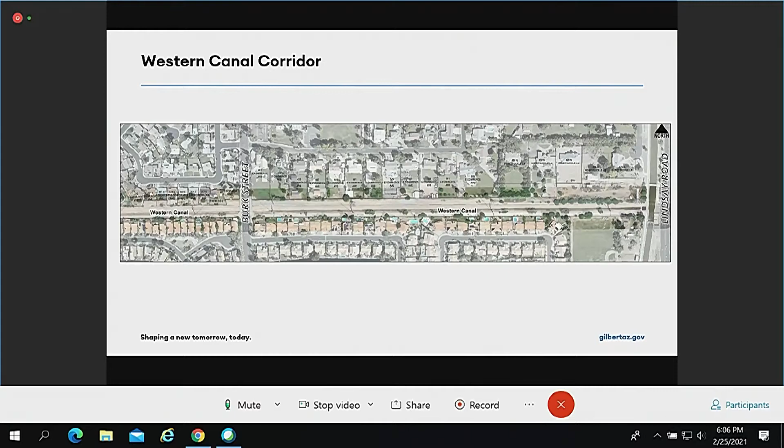Touching first on the town utilities through this corridor, we have three critical pieces of infrastructure. First, shown by the green line, is our 36-inch sewer. This was installed in 1986 within a 25-foot public utility easement. It's made of reinforced concrete pipe with an HDPE liner, and this pipe collects 3 million gallons a day of wastewater from approximately 15,000 households in the north part of Gilbert.

Adjacent to that 36-inch sewer is an 18-inch reclaimed water line installed under the same project in 1986. Once that wastewater is treated at our Neely Water Reclamation Facility, this pipeline takes that treated effluent and sends it to the reclaimed customers in the north part of town. This pipe is composed of asbestos cement, and the town is actively looking to get rid of this pipe material in its system based on leak history and failures we've experienced over time.

So based on the age, being 35 years old, and the material that this pipe is made of, we know we're going to have to complete replacement of this line in the near future.

South of these two pipelines, within a town-owned Gilbert parcel in the Western Canal, is a 24-inch potable water line. This was installed in 1991 and made up of a concrete cylinder pipe. In 2018, we experienced a failure on this line within Freestone Park, which raised our awareness and concern over the integrity of this pipeline.

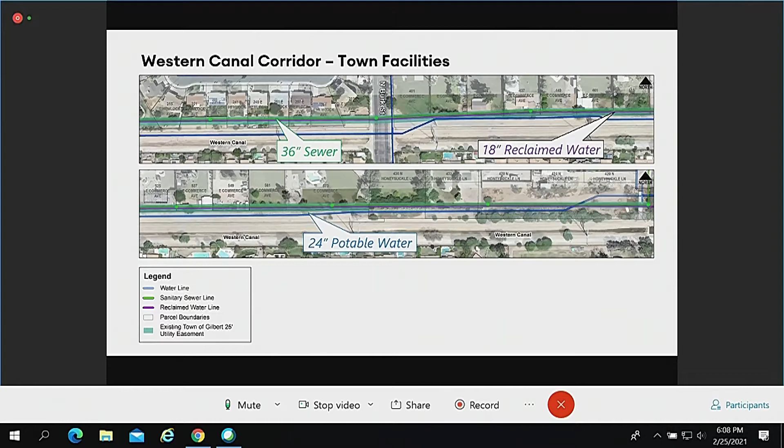Now to touch on some of SRP's facilities that exist within this section. SRP has the Western Canal, which is lateral 9.5. They also have a secondary delivery canal north of that, which is lateral 9.4. There's 2 sets of electrical transmission towers with both single poles and lattice towers - a 500 kV on the south side of the Western Canal and a 230 kV on the north side. So this is a very critical corridor for both town and SRP, and very congested. You can see highlighted in the orange hatched area, that is SRP's existing easements for their overhead electrical.

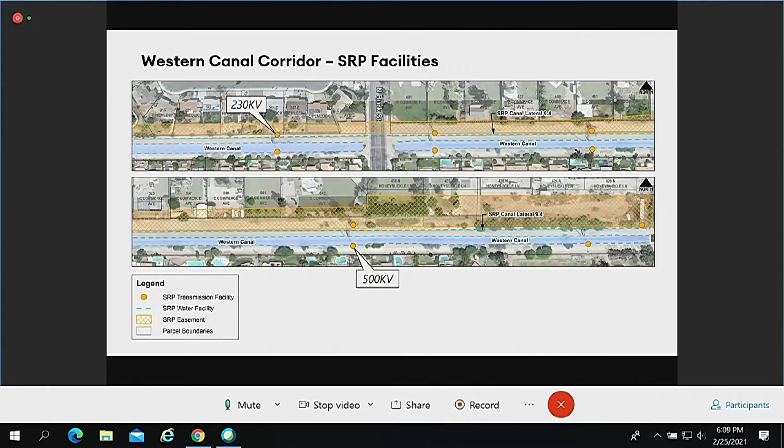So focusing in on the section west of Burk, you see the town facilities here. That green line is the 36-inch sewer. The purple line is the 18-inch reclaimed water. The blue line just north of the Western Canal is the 24-inch potable water. The green shaded area is the town of Gilbert public utility easement.

And then the orange hatched area is SRP's easement. And you can see that west of Burk, the town's easement and the SRP easement share the same common line on the north edge. They're 36.5 feet from the southern property line of these parcels, extending the same distance north.

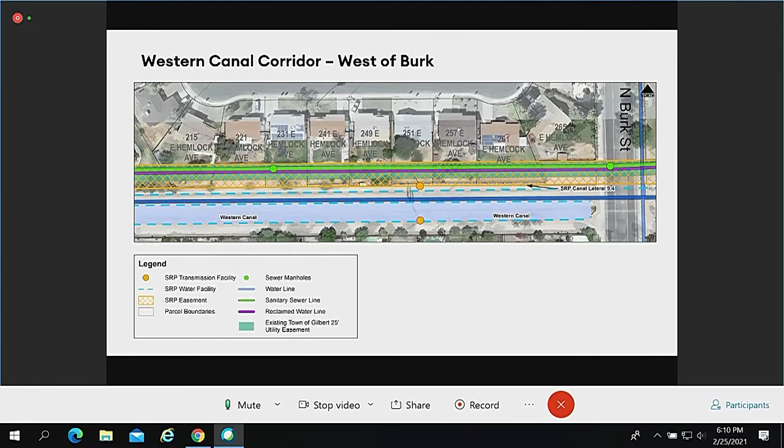Zooming in a little closer here just to give a feel for what the town utilities are and where they are relative in that parcel. You can see that green line, which is the sewer, the purple, which is the reclaimed water line, exists within that 25-foot easement, with the SRP easement overlapping that. Our easement was offset from the southern property line 11.5 feet because of the existing transmission tower that exists along that southern property line. So SRP required us to shift our easement north to provide adequate separation from their facility.

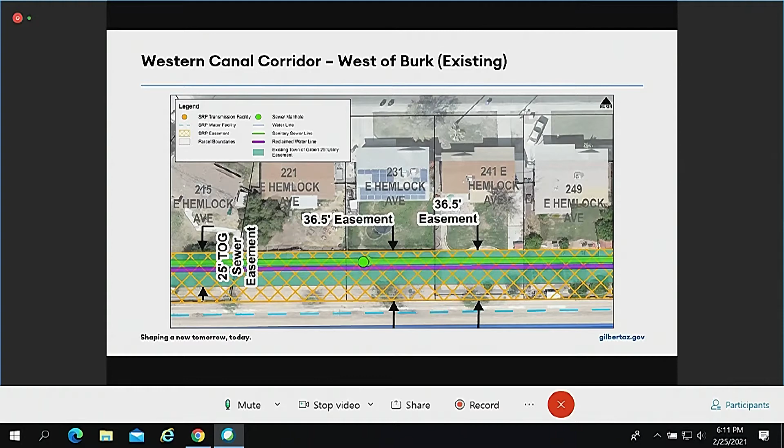So this is a cross-section of that same location, just to try to show a visual of the height and depth of the existing facilities. Starting from the left side, you can see that 500 kV tower there. Then you have the Western Canal. And between the Western Canal and that secondary delivery lateral is our 24-inch water. It straddles both of those canals. It's approximately 5.5 feet deep in this area.

After you go right or north from that, you see that second SRP tower, which is the double circuit 230 kV tower. And then just north of that is the existing masonry wall on many of these parcels. To the right of that, 11.5 feet, you see the town of Gilbert public utility easement, which is 25 foot wide, which encompasses our 18-inch reclaimed water line with approximately 6 feet of cover, and the 36-inch sewer, which is approximately 15.5 feet of cover, 19 foot to the bottom of that pipe.

This red dashed line here is the property line for these parcels. You can see that tower is just off the property line for these parcels. The green shaded area is the town of Gilbert public utility easement, where we had to shift that easement to the north back in 1986 when it was acquired by the town to provide that separation from that SRP tower.

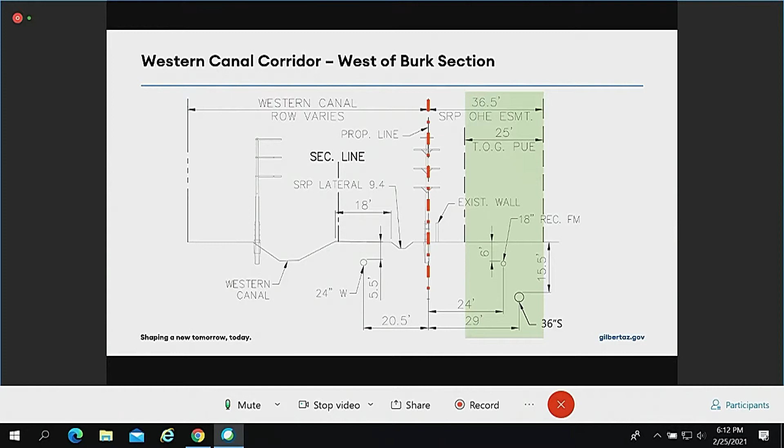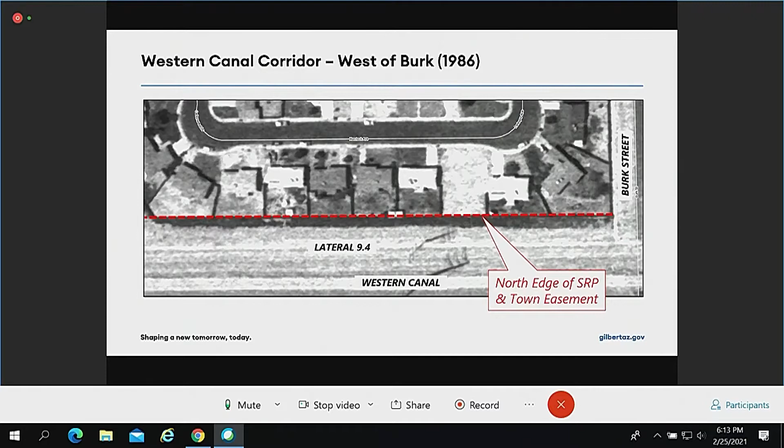There was no obstructions within the SRP or town easement at that time. As we progress 30 years later, 2016, we see that many of the parcels have extended their wall to the south, likely with approval by SRP and the town at that point. But you can see that 6 of these 9 parcels have now built their masonry walls within the existing easement area, creating obstructions to access those 2 utilities.

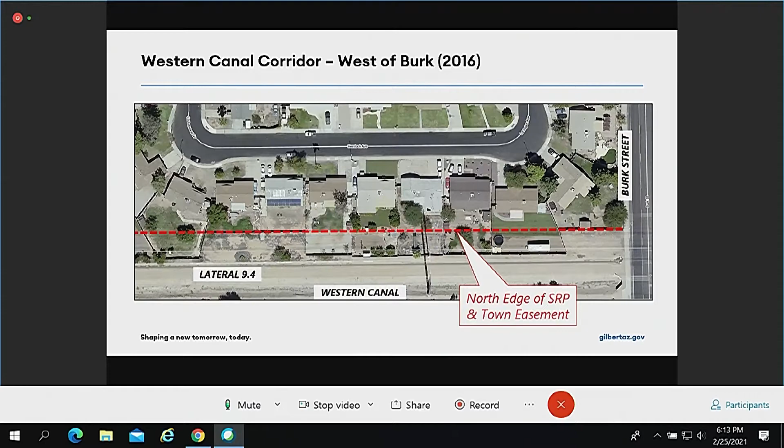Now we'll focus on the section from Burk to Lindsay. As I described in the other slide, the SRP and the town easements overlap each other. We have those 3 critical pieces of infrastructure through this segment.

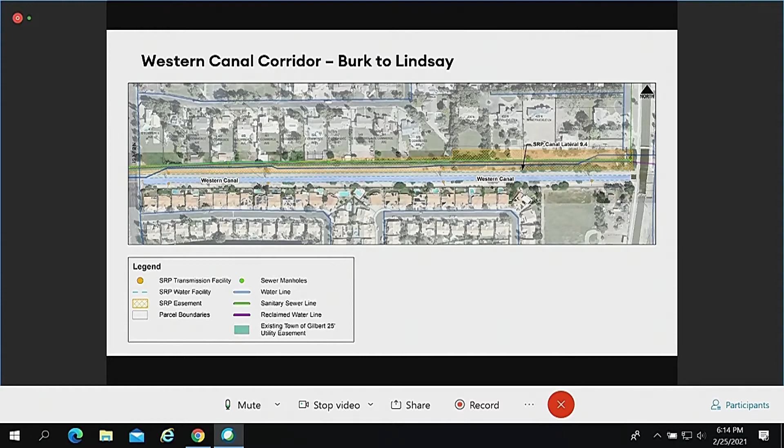Zooming in further to show some detail of how they exist currently, we have our town easement in the green shaded area. The green line is the 36-inch sewer, the purple line is the reclaimed water line, and the blue line is our 24-inch potable water line. You can see the SRP easement is a little south of our easement here, but still overlaps.

You can see that 24-inch potable water line had to angle just after that SRP pole, to provide clearance to the SRP pole, and then jog to the south to where it straddles the canals going west.

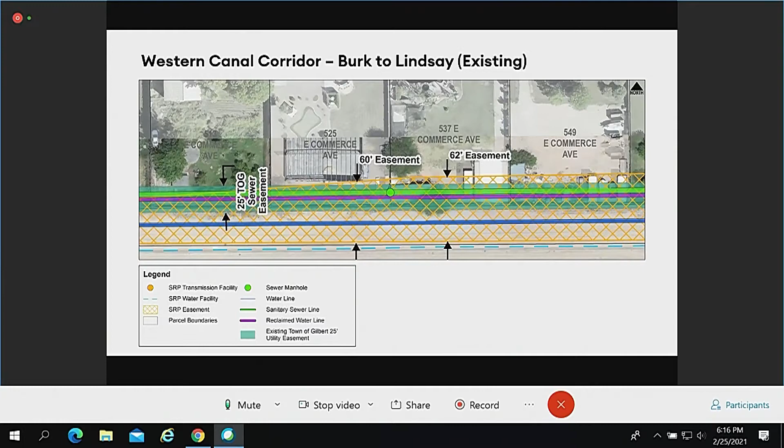So 9.5 feet north of that tower footing is our 24-inch water. We know that's probably as close as SRP is going to let us get to that tower, based on concerns over the structural integrity of the tower and having an active pressurized water line that close. There are significant concerns.

7.5 feet north of that, you have the property line for these parcels between Burk and Lindsay. The Town of Gilbert easement exists roughly 21 feet north of that property line and 4 feet south of it. So where that existing masonry wall is constructed on the south of these parcels, that is within the Town of Gilbert public utility easement. There we have our 18-inch reclaimed at 7 feet of cover and our 36-inch sewer with approximately 20 feet to the bottom of the pipe.

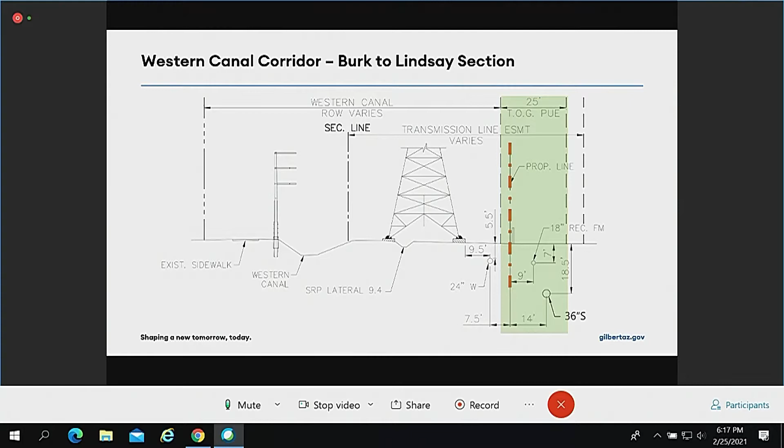To provide some background on the easements through this subdivision, this is the Gluchessi Ranch Phase 2 subdivision. The town easement was dedicated on the subdivision plat. SRP's easement existed prior to, but is reflected on the plat as well. The easement language from that plat reads: construction within easements, except by public agencies and utility companies, shall be limited to utilities and wood, wire, or removable section fencing.

The parcels east of Gluchessi Ranch are within the Rio Caballo subdivision. That was developed prior to the reclaimed water and sewer going in, so the easement was acquired by the town in 1985 via a separate document, which reads similar to the Village 2 subdivision, granting the town the right to install, repair, maintain, alter, and operate that sanitary sewer and effluent water lines.

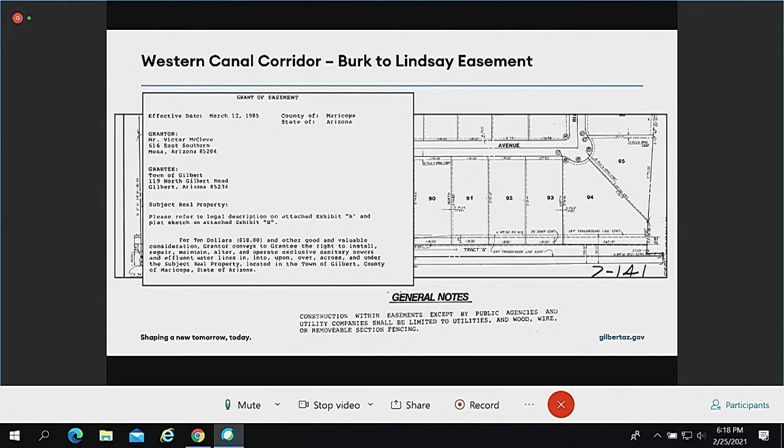Now I want to go over a little of the timeline of this project. Between 2015 and 2017, the town experienced some pretty significant failures on their wastewater system: the Layton Lakes Force Main, Crossroads Force Main, and a second Crossroads Force Main failure, which heightened the awareness of staff to complete an active inspection process for all of their wastewater infrastructure.

Following these failures, WW1060 was initiated with a first phase to repair an immediate need on Ocotillo, but also with an effort to complete a video assessment of this pipeline along the Western Canal. That assessment was completed on this 36-inch sewer from Lindsay all the way to Neely in 2017.

Following that assessment, we saw a significant degradation of that pipeline, and we knew there was a need to bring on a design engineer to immediately begin design of this project. Our design engineer, Entellus, was hired in March 2018.

Between mid-2018 and mid-2019, Entellus worked up 30% design plans. The scope of those plans had the intent to relocate this 36-inch sewer outside of these 24 parcels. We had full intent to place that 36-inch sewer within SRP property, the town parcel, and outside of the residential parcels. Based on initial collaboration meetings and working through those plans with SRP, it was deemed a non-starter with zero chance of relocating this sewer within the Western Canal, based on this being USA fee land by the Bureau of Reclamation, with zero potential to relocate outside of the easement into the Western Canal.

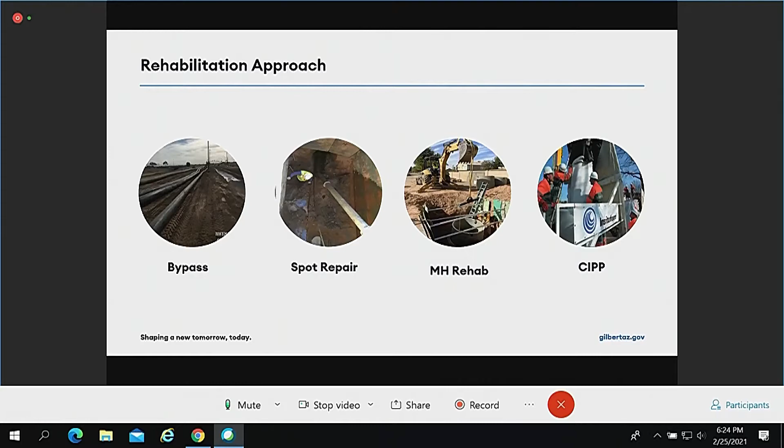So just to dive a little deeper into those 4 areas of work, this is what a typical bypass setup looks like. This was down on Ocotillo when the first phase of this project was under construction, with similar flows. You can see numerous plastic pipes laid out here on the surface. To bypass that 3 million gallons, it's likely we will have numerous pipes on the surface. We're not sure whether those would go north of the existing sewer or south within the town-owned parcel, or potentially the Western Canal. That bypass plan will be worked out with our contractor down the road, but we just want to convey what that visual will look like.

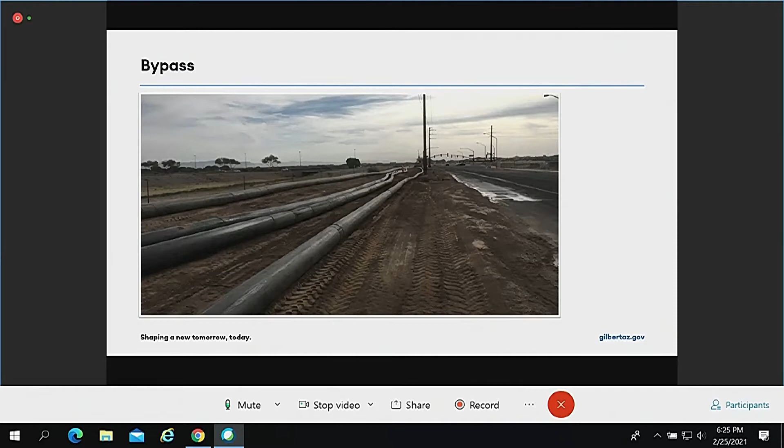And this isn't just a single pipe. There's likely triple containment because of the environmental concerns of a sanitary sewer overflow adjacent to these waterways. What that means is you have a pipe within a pipe within a pipe, so you have that triple protection to prevent spills within waterways. Another picture here just to show some scale of what that looks like. This is a significant effort to bypass those flows to complete the rehab option.

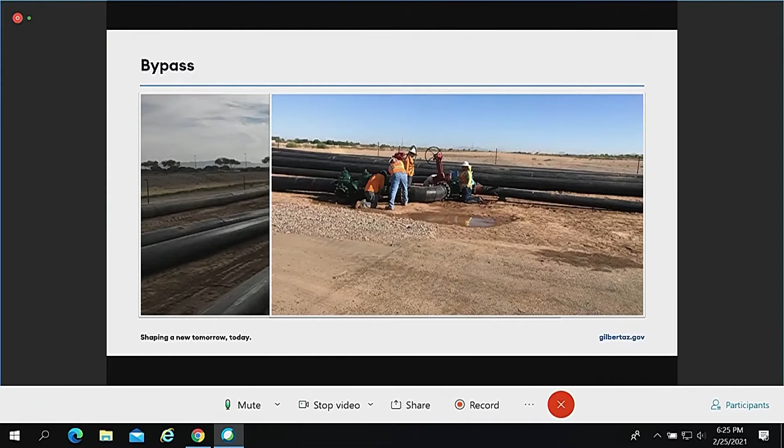So that spot repair - if we find areas in the pipe that require us to go in and replace that pipe prior to lining it, it may look something like this. We don't know of any at this point until we do a better assessment. The last assessment was 3 years ago. We'll go in, do an assessment prior to lining it, and identify these spot repair areas prior to starting construction. But this is just a general feel for what that may look like.

So the excavation area, if you can see that, would be approximately 10 foot by 40 foot, maybe 20 foot deep in some areas. It's going to require significant shoring to provide safety for the laborers as they're doing the work down in the trench. There also needs to be a significant work area to stockpile soil, bring in materials, and have work area for the contractor.

For this spot repair scenario, we'd be looking at approximately a 40-foot by 70-foot envelope. That would require removal of obstructions. We would have to remove the masonry walls that exist on these parcels, move structures out of the way, and we would be actively excavating in some of these parcels that need spot repairs.

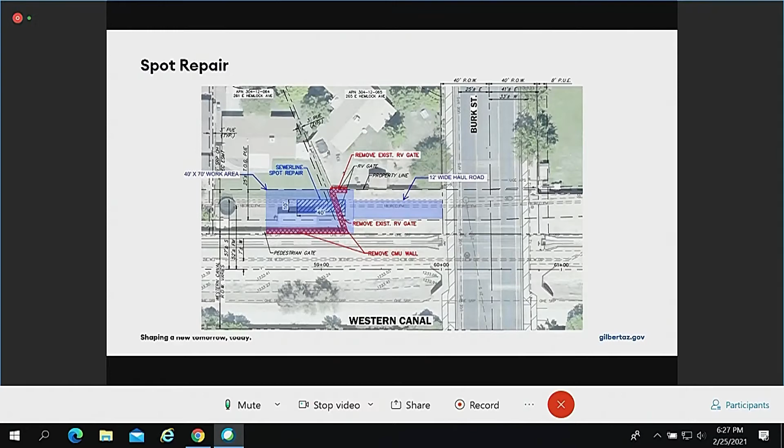Here's a good visual of a similar situation to what we have. This is a 36-inch reinforced concrete pipe where the entire top of the pipe has failed. You can see all that's left is the bottom half of that pipe. This may be the case in some areas along this alignment.

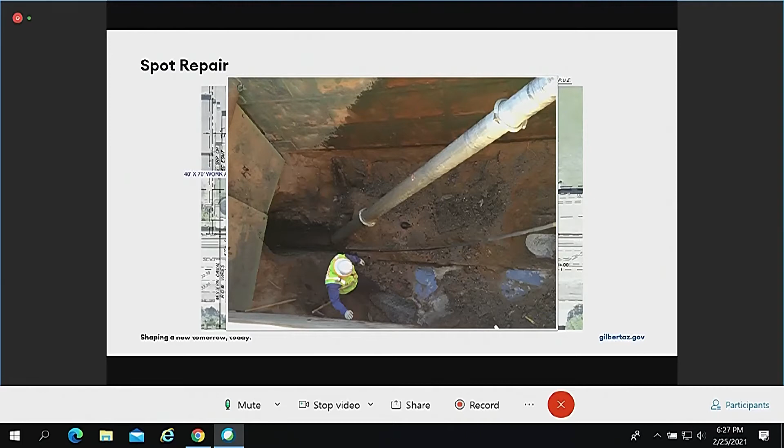Secondly, we'll have to do manhole rehabilitation. There's 6 manholes between these 24 parcels that we will have to go into and rehab due to significant corrosion. What that manhole rehabilitation effort looks like is inserting an inert material into the existing manhole.

So we will have to excavate around that manhole approximately 10 foot by 10 foot to remove the cone of the manhole to allow space to insert that liner within the existing manhole. To provide space for the contractor to work, it would likely be a 20 foot by approximately 50 foot area for staging of materials, soil, and equipment to get in there and do that work.

Once again, requiring removal of the walls and obstructions within that area. You can see on the right there an activity very similar to what we would be proposing for these rehabs.

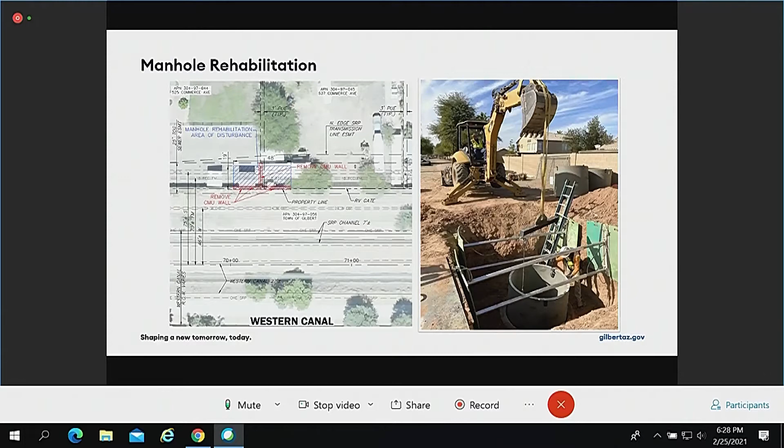After those rehabilitation efforts are completed, at that point we would be looking to install that cured-in-place pipe. We're trying to utilize that technology because it's the least invasive solution for this degraded pipe. Cured-in-place pipe is a great technology - it really limits the extensive excavation and allows us to save that pipe in its current place.

However, to install that cured-in-place pipe, there's a significant window needed to get the technology in there to insert that liner. As you can see here, typical setup for this size of liner being a 36-inch pipe would require a 2-truck train to set up over that manhole. You're going to have one truck that's hauling in the liner that is soaked with resin. That has to be held at a certain temperature so it doesn't begin to cure - so that's a refrigerated unit.

You're also going to have a secondary truck that has the boiler equipment that, once that liner's set, puts in steam to cure that liner. You're also going to have a mechanism to deploy the liner. So what that looks like is setting up over this manhole, requiring roughly a 20-foot by 300-foot window that's unobstructed so we can insert a liner into this manhole.

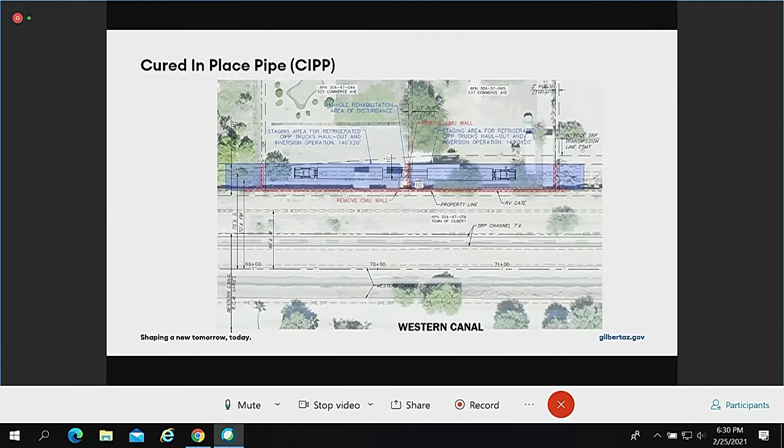So with that, the project team, over the last year, worked up numerous criteria and solutions to address the issues we have along this corridor. I'm going to go over some of the criteria and the solutions, which informed the decision-making through the process of developing these solutions.

First is improve the infrastructure reliability. Our goal is to give a 50 to 100-year design life for whatever we put in the ground. Next, we need to increase the access. As you're aware, over time, obstructions have occurred along this easement, so one of the criteria was to increase access along this alignment.

Another criteria was to reduce the present impact to landowners, regarding the land acquisition effort. Next was to reduce the future impact to landowners. Next, we considered best value, meaning a cost-benefit analysis of how that solution addresses the other criteria we've set forth.

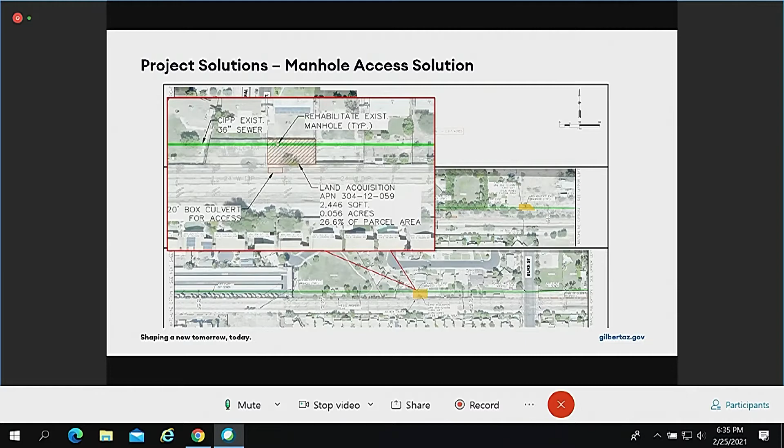To summarize that solution, our estimated construction cost just to complete the rehab of the pipe is approximately $4.2 million. Land acquisition and relocation costs are not included in that figure. Once we get appraisals completed, we'll be able to modify this value. This solution only completes rehabilitation of the sewer pipe and manholes in their current location. The land acquisition is focused around 7 parcels to move walls and access those 6 manholes -- it's 7 parcels because one manhole is close to a property line, so we'd need to acquire property on both parcels. Once again, this is only access for sewer maintenance, and it does not assist with a future rehabilitation effort.

So to go over how this solution meets the criteria: it improves infrastructure reliability, because by lining this sewer line we get that 50 to 100-year design life. It increases access, and the reason that's a yellowish-brown check mark is because it only partially increases access -- we're getting access to these manholes strictly for maintenance, not to the sewer pipeline between the manholes, nor to that 18-inch reclaimed water line that we know will need work in the near future.

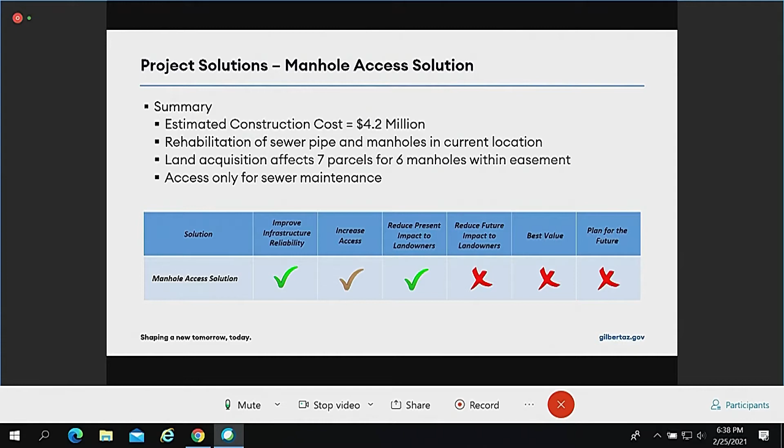Next, I'll discuss the relocation solution, partial relocation solution. We had the design team look at how we can shift all three of these pipelines as far south as possible within the existing SRP constraints. They looked at the 36-inch sewer, 18-inch reclaimed, and 24-inch potable water, and whether we can push those south, replacing them in entirety right now as close as we can to those SRP towers, in an effort to reduce the land acquisition for these 24 parcels.

As we approach these SRP towers, we would likely have to jack and bore adjacent to the towers. What we mean by that is we would have to auger to install a casing so we don't have open excavation next to those towers—significant effort with a large casing to accommodate that 36-inch sewer. This would require significant collaboration with SRP that would have to be completed. This is a high-level preliminary design completed by our design team.

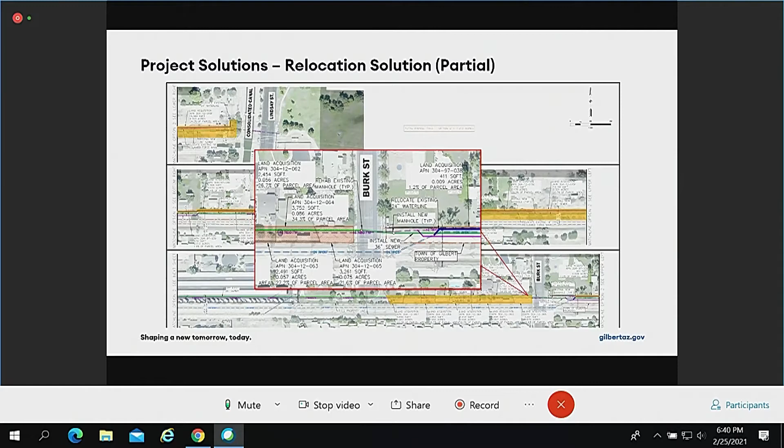To summarize this solution, estimated construction cost is $8.2 million. That's significantly higher than what you saw for the manhole access solution, mainly because we're looking to replace 2,500 feet of pipe for those 3 utilities—water, sewer, and reclaimed water. The rest of it, west of Burk and throughout the remainder of the alignment, will be completed using those rehabilitation methods that I outlined in the presentation.

The result of this solution: we were able to reduce the land acquisition for 12 parcels between Burk and Lindsay. It went from approximately 21 feet down to approximately 10 feet. As this was a preliminary design, it will require significant collaboration with SRP down the road, likely extending the schedule of this project upwards of a year at least, with the risk along the way of a failure on that 36-inch sewer.

How this solution addresses those criteria: it does improve the infrastructure reliability for the 3 pipelines. It does increase access, as the acquisition associated with this solution provides unobstructed access along the entire corridor. It doesn't reduce the present impact to landowners because it still requires land acquisition from all 24 parcels. However, it does reduce some of the width for half of those parcels. It does reduce the future impact to landowners because we will not have to come back in the future for additional land to complete replacement of those 2 additional pipelines.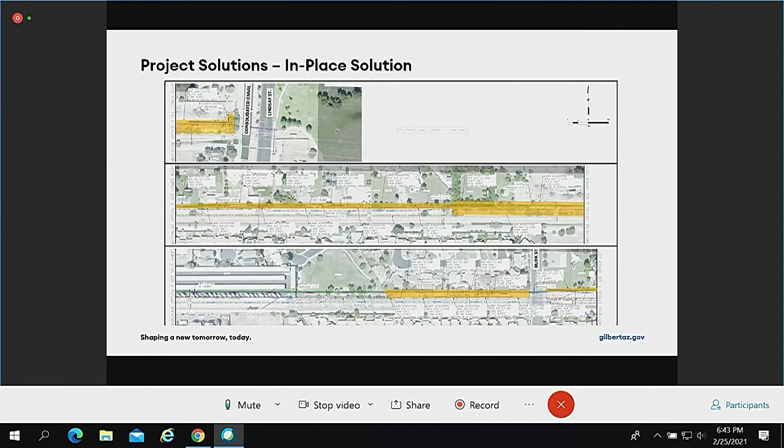Showing a couple close-up images of what that looks like in certain areas along this alignment, between Burk and Lindsay. You can see that cross-hatched area, the red cross-hatched area, is the proposed land acquisition. North of that, the purple hatched area is a proposed 5-foot temporary construction easement. That's a temporary area we would request from the landowner to allow us to move the wall onto your property. It would expire at the completion of construction and is strictly intended for us to do work on your property. You can see the proposed acquisition here is 21 feet from the southern property line.

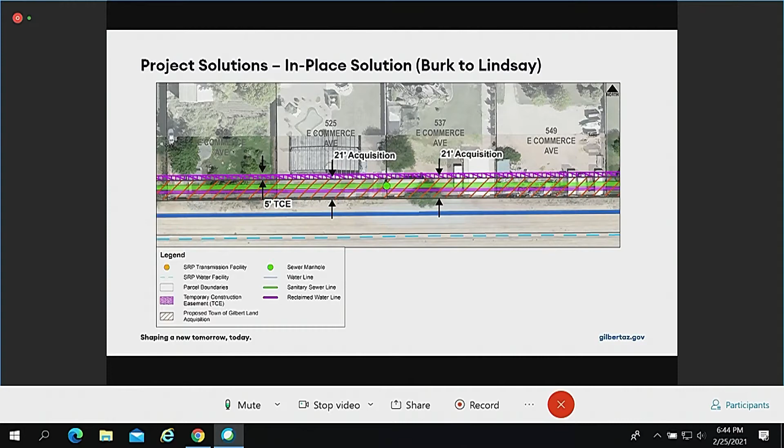Looking at a section west of Burk, as I mentioned, since our easement is offset to the north 11.5 feet, it would require 36.5 feet of acquisition here. You can see our pipeline shown there. The red hatched area is the proposed acquisition, and the purple hatched area is that 5-foot temporary construction easement to allow us to build that masonry wall within the project back on your property, outside of the town's proposed acquisition area.

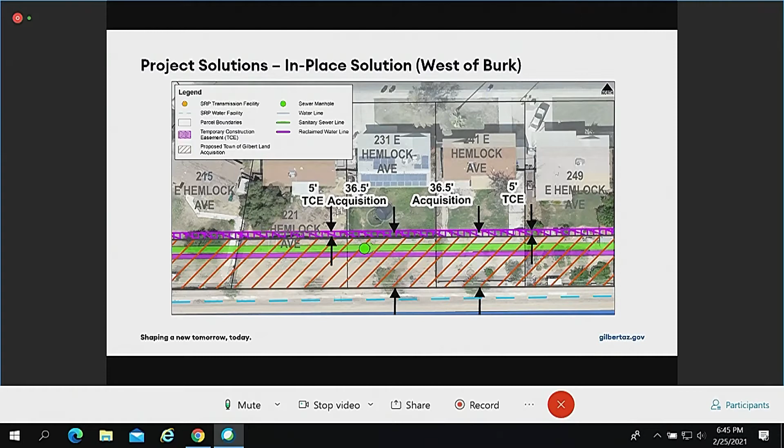So to summarize this solution, estimated construction cost is $4.3 million. That's strictly to rehab the pipe. You can see it's comparative to the first solution because we're only looking to rehab that 36-inch sewer within the first and third solutions at this time.

This would acquire the existing easement as well as the additional land south on many of those parcels. This would provide the area for us to complete the replacement of that reclaimed water line in the future and the potable water line in the future.

How this solution meets those criteria: it does improve infrastructure reliability for that 36-inch sewer. It does increase access as we have unobstructed access to all 3 pipelines along this corridor. It doesn't reduce the present impact to landowners. We know that's a significant impact to each one of you. It acquires that existing easement from all 24 parcels with the additional 11.5 feet west of Burk, and additional land to the south for the 3 parcels adjacent to Lindsay, where we would need access from the south and not to leave a remainder parcel on the southerly edge of your parcel.

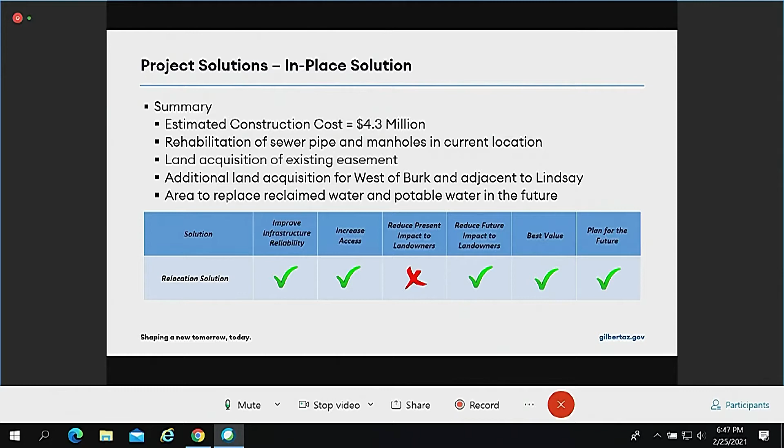Here's a summary of the 3 solutions I just presented. Since all land acquisition is completed within this last project in the in-place solution, we feel this is the optimal solution to proceed for this project.

Just to touch on some of the benefits associated with this solution, it increases the visibility and access to our critical infrastructure along this corridor. This sewer project is the first of 3 replacement projects that we see along this area. Second will be the potable water line. Third will be the reclaimed water line. We know that we will need to complete replacement of those additional utilities. This also accommodates future replacement or rehab efforts down the road, whether it's 20 years from now or 50 years from now.

The Western Canal Corridor is constrained, as I showed, with town and SRP facilities. There is not potential for us to relocate within the Western Canal. We believe this solution mitigates ongoing and future conflicts from both the town and the residents' standpoint. This provides the optimal solution for us to provide safe, reliable utility services to the community.

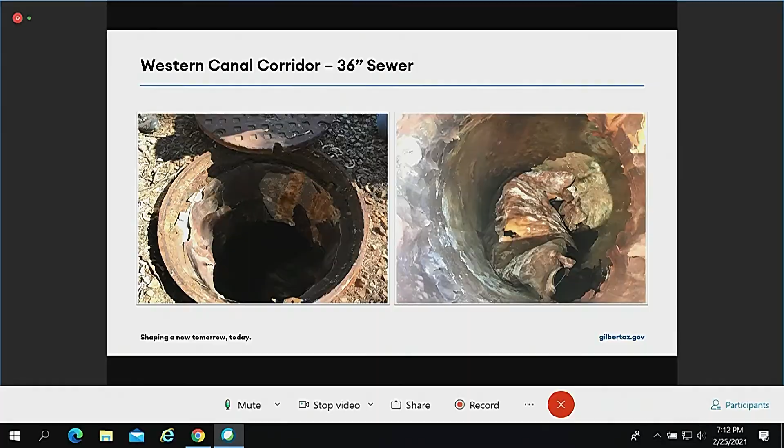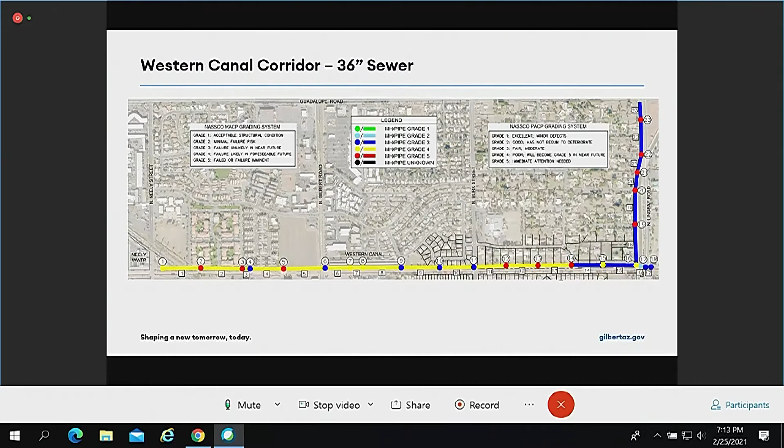In some ways, this conversation is great because we are ahead of the failure. We are not standing in your backyard right now, not standing around a hole that has formed, and not trying to set up a bypass pipe for 3 million gallons a day of sewage past the Western Canal all the way down to the Neely Wastewater Reclamation Facility. We are here before it's happened, and that in itself is a good thing. We recognize it's difficult to understand that the pipeline we can't see degrades. We know all pipelines have a limited life requiring rehabilitation, and in particular, the asbestos cement pipe - from our experience in other locations in our system, we know that's going to also give us problems.

The reclaimed water line is also of a material we know is going to create problems for us as well. Just a quick follow-up question: if that's the case, why don't we run these things under the roads? I often see the regular sewer lines being dug up, instead of where they're going to put a parkway back there, a beautification project. You're going to have to dig up the beautification project. Why don't we just reroute it under the roads then? Wouldn't it be simpler?

About the rerouting, that's a great question. The gravity sewer line, we're unable to reroute because it falls by gravity. There isn't enough elevation difference between where it's at, and we can't move it. To move it anywhere else makes the distance longer, it becomes flat, and then it doesn't flow, and degrades even faster. So we physically can't move the sewer line - we're stuck with it in its location. And the water line and reclaimed water line were all placed decades ago in a different condition than exists today.

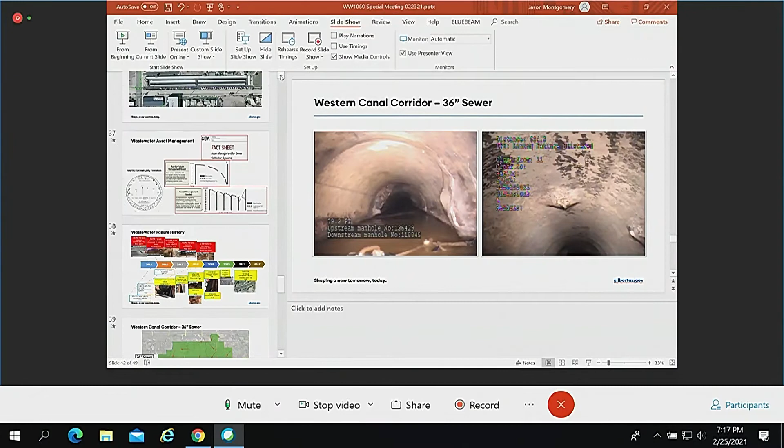Now, gradually, as there has been improvements to many of those properties within the easement, including masonry walls and structures and horse corrals, there's been slabs poured over the manholes. Many of the manholes have been buried. The cumulative effect of all of these items effectively delays or denies our ability to respond to the system's needs.

The combination cleaner we use only has a reach of 700 feet. A blockage in that gravity sewer will surcharge North Gilbert with 3 million gallons of sewage a day, and that is our only access and our only way to maintain that system.

There's only one manhole maybe that might have a hard time getting to here, right? None of the others, they're not.

So maybe if you want to address why the storage unit is exempt. Thank you for that about the storage unit. And they're not exempt, but we're not talking about that facility tonight.

The Salt River Project has indicated that the water line currently between lateral 9.5, or the Western Canal as we all know it, and that irrigation delivery lateral to the north, when we need to replace it, we cannot be back in that space. They've indicated that we're going to have to go into where that storage unit facility is at. At that point in time, we're going to be having a discussion with that property as well, as part of that water line within the next probably 3 to 5 years. It's likely that the same situation is going to happen there with that business, and we're going to potentially be acquiring that property as well.